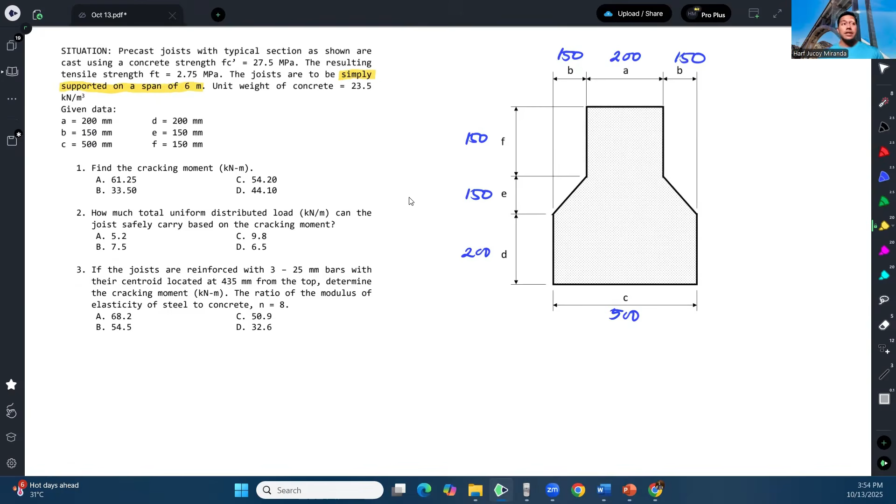Pero normally naman kasi, total sinabi niya to, simply supported, no? At dahil kapag simply supported ang isang beam, it will be subject to pure positive bending. So ibig sabihin yung bending moment natin pag ganito.

Okay, why is that important? That's important because we need to know exactly where is the extreme concrete tension fiber. Kasi doon mangyayari yung cracking na binabanggit natin. So in this case, dahil sa positive bending, ito ngayon ulit yung extreme concrete tension fiber. Ito namang nasa top, ito naman yung extreme concrete compression fiber. So syempre magbe-base tayo dito sa extreme concrete tension fiber in finding the cracking moment.

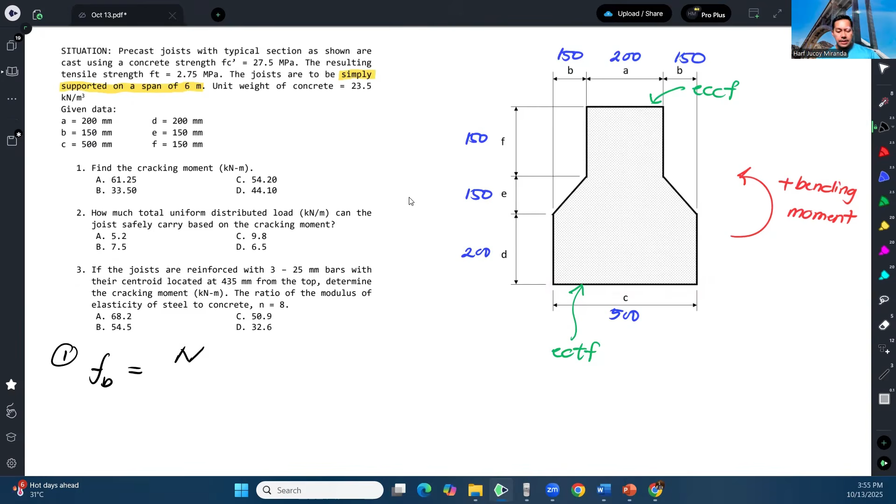But now, we will need to know first ano yung neutral axis, or nasaan yung neutral axis. Kasi para ma-compute natin yung cracking moment, magbe-base lang yung computation natin sa bending stress. Ang bending stress ay MC over I. So, gagawin lang natin tong tensile stress. Ito magiging cracking moment, kasi ito, yung C, papunta sa tension side or extreme concrete tension fiber, over the gross moment of inertia.

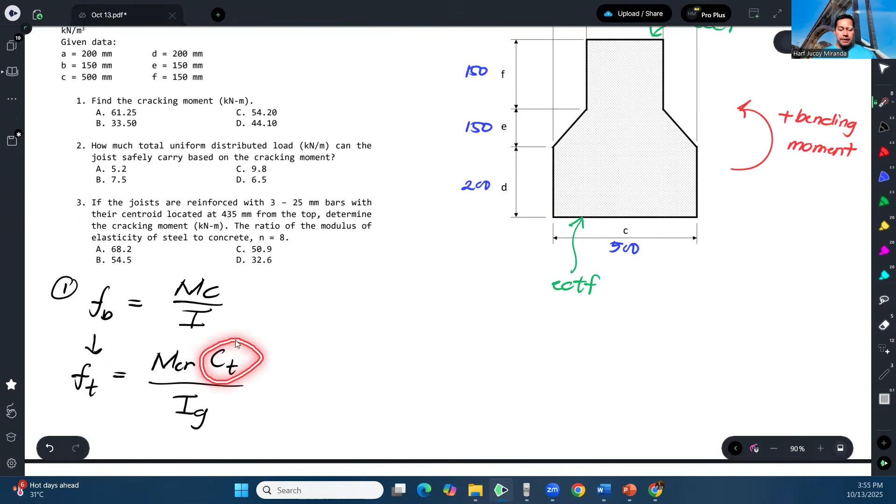Okay, now of course kung rectangle ito, walang problema sa pag-define ng CT. Wala rin problema sa pag-define ng gross moment of inertia. Kaya lang ngayon, hindi na siya rectangle. So anong gagawin? What we would do is we would first subdivide this into simpler shapes.

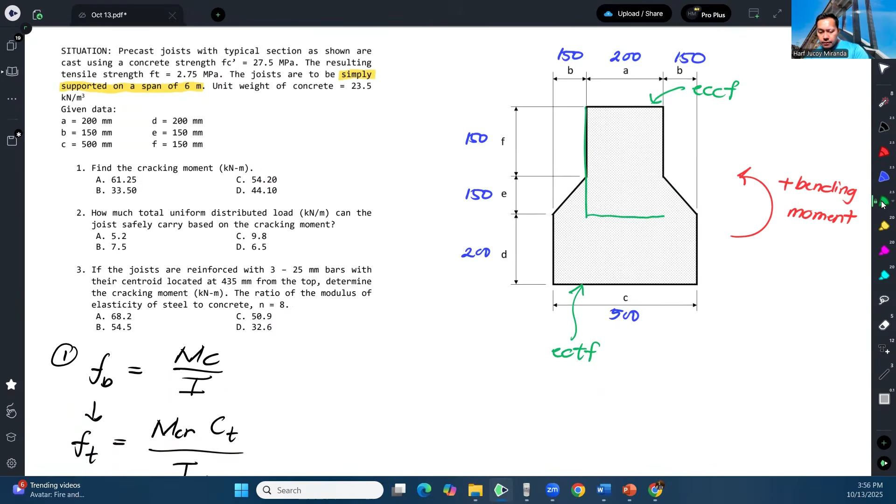Ang naiisip ko na magandang subdivision dito ay pwedeng ito, hanggang dyan. Okay, section 1 yan. Tapos ito, dalawang triangle, sabihin ko na lang na pareha silang section 2, total symmetrical naman. Tapos ito yung section 3. So, dalawang rectangle, dalawang triangle.

So, tatlong sections. Okay, let's define kung nasaan yung neutral axis nito. So, let's say ang neutral axis niya ay located dito. Assume lang ito, hindi naman importante kung tama yung assumption. Let's say nandyan yung neutral axis.

Ayan. So, i-define natin yung location ng neutral axis. Pwede kasi from the top, pwede from the bottom. So, kayo bahala, sa akin gawin ko na lang na from the bottom. Ayan, para ayan na rin mismo kaagad yung CT natin. Kung ano man yan, na Y bar, kung ano man yung distance na yan, yan na rin kaagad yung CT natin, kasi yan yung location ng extreme concrete tension fiber.

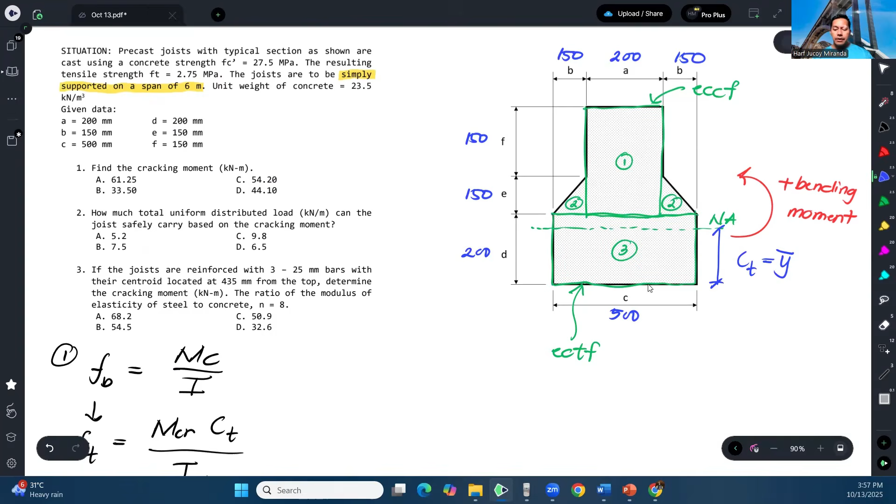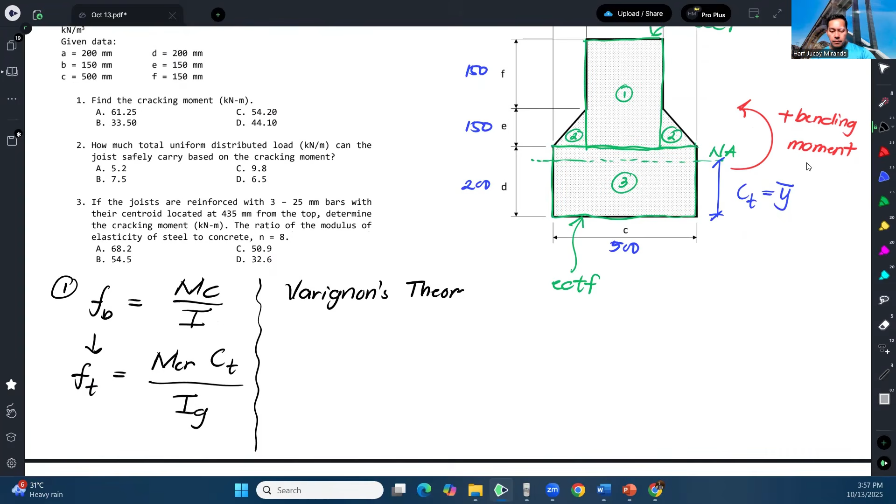Okay, so para ma-locate muna yon, we will apply Varignon's theorem. Okay, magmo-moment area tayo, summation of moment area. Sa bottom tayo mag-base.

So, we have, ang total area, tawagin kong AT, times y bar, equals yung moment ng mga subdivided shapes. So, yung area 1, y1, plus yung area 2, dalawa to no, gawin ko na lang times 2, area 2, tapos y2, plus area 3 times y3. Where y1, y2, and y3 are the location of the centroid of each shape from the bottom.

Okay, so ito, ano ba ang location ng centroid nito from the bottom? Dahil rectangle yan, mula bottom hanggang dito muna, that's 200. Tapos mula bottom hanggang dito, ano bang height nito? Di ba ang height nito ay 300? 300 kasi siya, so ibig sabihin yung centroid niya ay nasa half ng 300. So, in short, nasa 200 plus 150. Tapos, ito namang Y2, yung centroid naman itong dalawang triangle na to, nandito.

So, located siya at a distance Y2 from the bottom. Ano yung distance na yun? Mula dito hanggang dito muna sa base ng triangle, that's exactly 200. And then from here to here, remember, ang centroid ng triangle ay 1/3 from its base. So, ibig sabihin, 1/3 ng 150. And lastly, yung centroid nitong 3, dahil rectangle lang naman yan, that will just be half of 200, o 100.

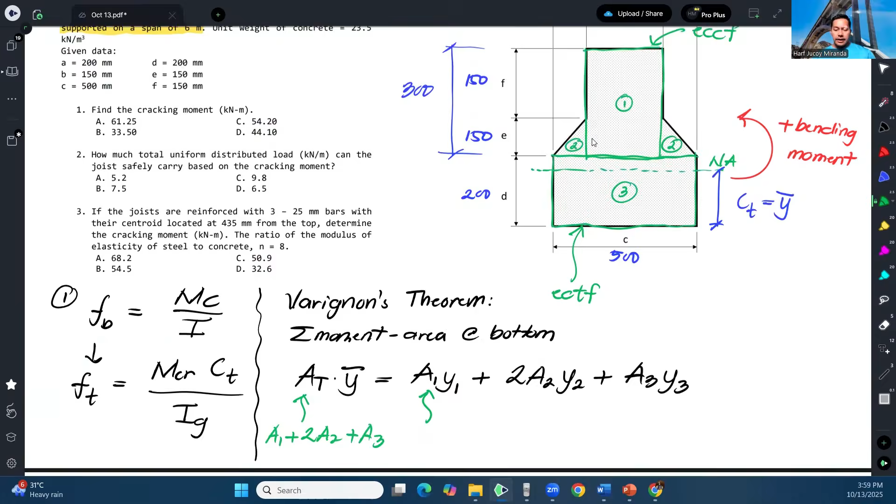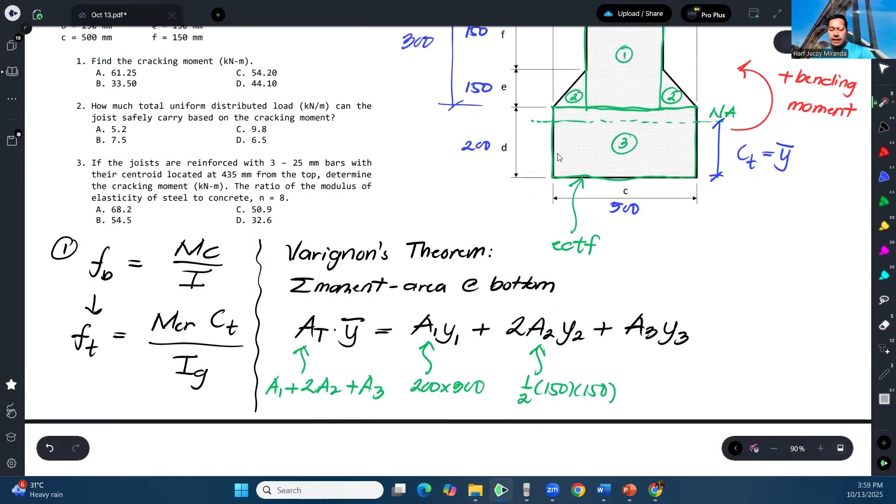Itong A1, area 1 is 200 by 300. Tapos itong A2, area ng triangle, so 1/2, 150 by 150 - 1/2 base times height. Ang base natin 150, ang height natin 150 din. Tapos yung area 3 natin is just rectangle, 200 by 500.

Tapos yung y1, yung y1 natin ay 200 plus half ng 300. Yung y2 natin is 200 plus 1/3 ng 150. Tapos yung y3 natin is just 1/2 ng 200.

Okay, so ulit, ito, mula dito hanggang dito, 200. Mula dito hanggang dito, kalahati nito. Tapos ito naman, mula dito hanggang dito, 200. Mula dito hanggang dito, 200. So mula dito hanggang doon sa centroid is 1/3 nung height na 150. And then lastly, mula dito hanggang dito is just half ng 200.

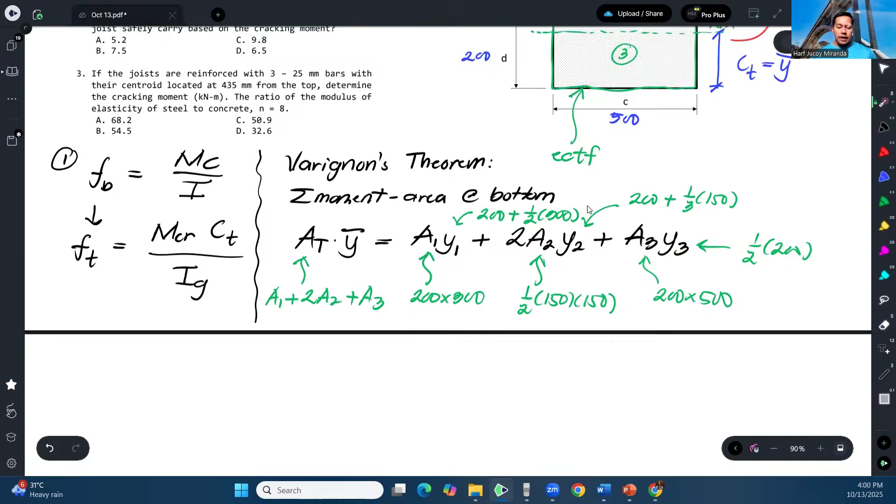Okay, and from there, we should be able to calculate for y bar. So solve natin yung y bar.

Okay, so dito diretsuhin ko sa calculator. Ito kunwari area 1 ko, tapos yung y1 ko i-compute na natin: 200 plus 1/2 ng 300. Plus dalawang area 2, lagay natin sa B: 200 plus 1/3 ng 150. Plus area 3 times y3, ang y3 natin is just half ng 200 or 100. Over yung total area is area 1 plus dalawang area 2 plus area 3.

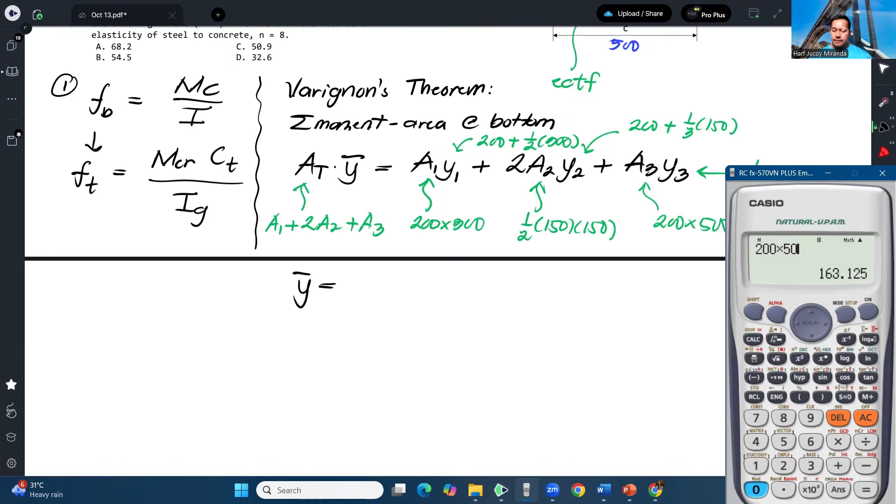Okay, press calc. I-define natin area 1: 200 by 300. Ang area 2 ay 1/2 base times height. And ang area 3 ay 200 by 500. Okay, so that will be our y bar: 200.68 millimeters, from the bottom.

Okay, so ang next na kailangan nating i-compute guys, okay na to. Ito na rin kasi yan eh, ito na rin yan. Yan na rin yung CT natin.

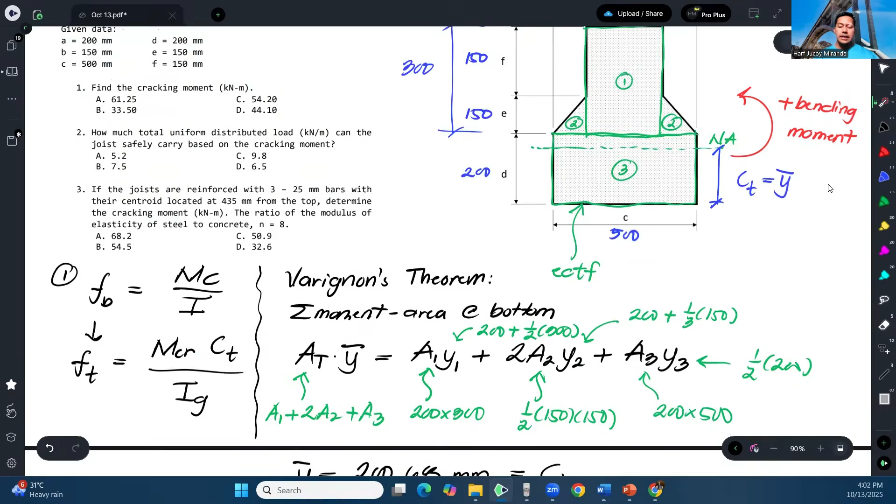Ang next na kailangan natin i-compute, yung gross moment of inertia naman. Ang problema ngayon, kailangan natin i-transfer lahat ng mga moment of inertia ng mga shapes na to papunta dito sa neutral axis. Okay, so magta-transfer formula tayo.

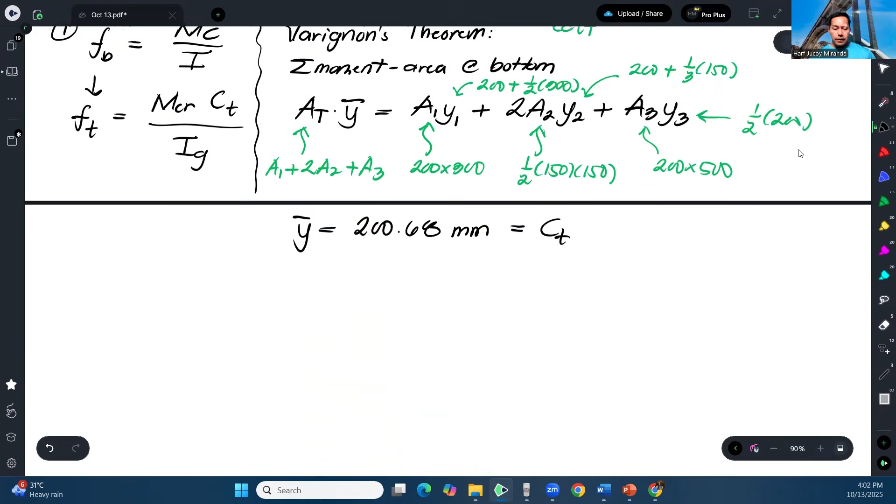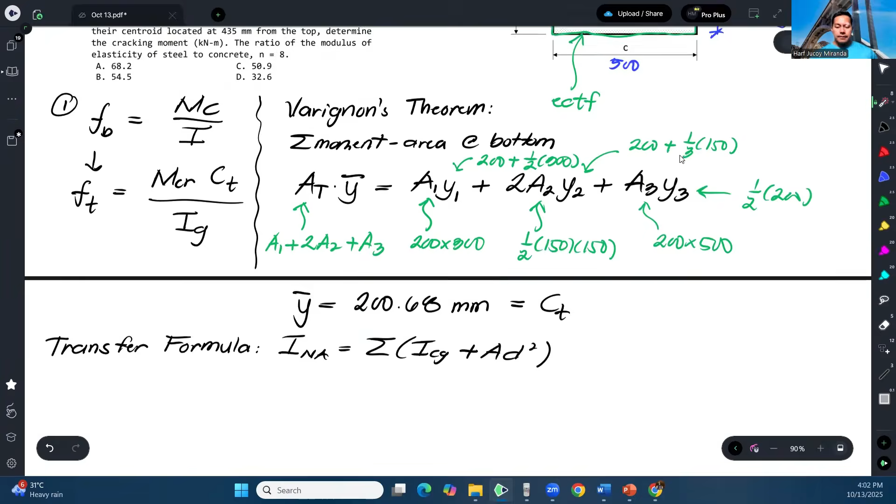So transfer formula: I NA is equal to summation ng centroidal moment of inertia plus A D squared. Tatlo yan, tatlong shape - I mean apat pala technically, pero tatlo kasi dalawa, parehas lang naman to, so times 2 lang natin to. Unahin ko na kagad to: ang centroidal moment of inertia nito is B H cubed over 12.

So B is, ano yung B nun? 200, tas ang H 300. So 200 by 300 cube over 12. Plus yung area niya, tapos D squared. Ano yung D? Yung D is yung distance ng sarili niyang centroid papunta dun sa neutral axis. So ito yung D1.

Ano yan? Gaano yan kalayo? Well, normally, ang ginagawa dito para mas mapabilis yung pag-compute ng distance na yan, gagamitin natin to palagi - always use this. Actually, store ko na yan sa calculator, store natin sa Y.

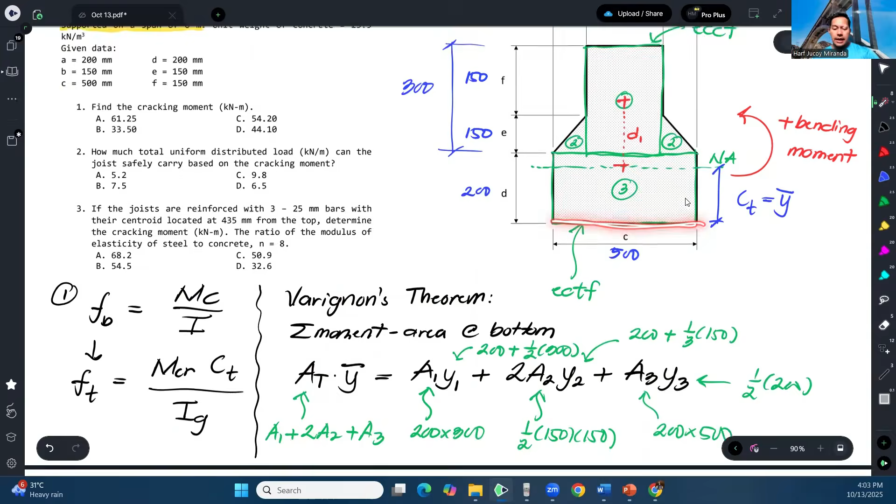Para mapadali, tingnan niyo, dahil ang basis natin kanina sa pagkuha ng Y-bar sa Varignon's theorem is from the bottom, so gamitin na lang natin itong mga distances na to - dahil from the bottom naman yan. So kunwari, ito yung Y1, mula dito hanggang dito, ito yan eh. Kailangan lang natin i-minus to para makuha to - ito minus ito. Kaya yung D1 natin, this value minus Y bar.

So lagay ko na lang: magiging 200 plus 1/2 ng 300 minus Y bar, squared. Yan yung para sa rectangle na nasa area 1.

Okay, next, how about area 2? So plus - ang centroidal moment of inertia ng triangle ay BH cube over 36. So BH cube over 36, plus area 2 D squared.

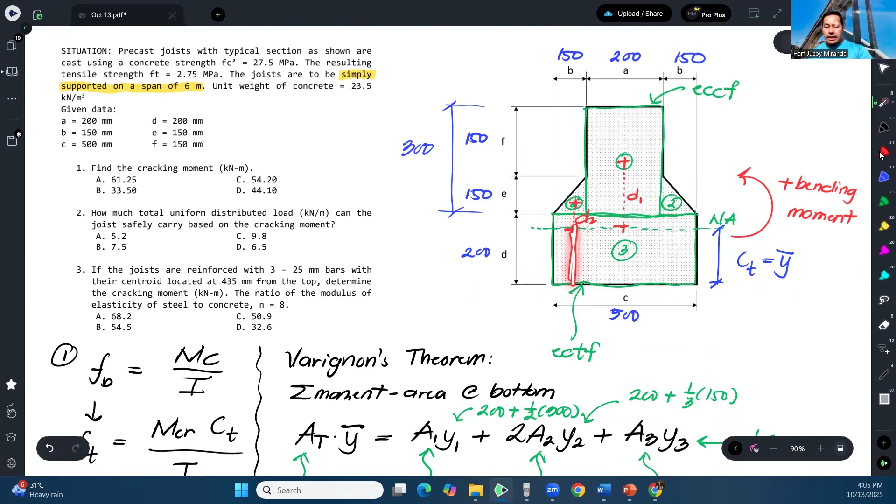Ano naman yung distance ng centroid niya papunta sa neutral axis? Ito na lang gamitin ko - hinahanap natin, gano'n to kalayo? Okay, so ulit, ang basis natin galing sa ilalim dahil nakuha naman natin yung Y-bar galing sa ilalim. So mula sa ilalim hanggang dito, ito 'yun - 200 plus 1/3 nitong 150. Ibabawas lang natin 'to, ano ba 'to? Yan yung Y-bar. So we will have 200 plus 1/3 ng 150 minus Y-bar, tapos don't forget squared.

Tapos lahat ng to, we have to multiply by 2, kasi dalawa yung area 2 eh. So same lang din naman yung distance nito - yan din yung D2.

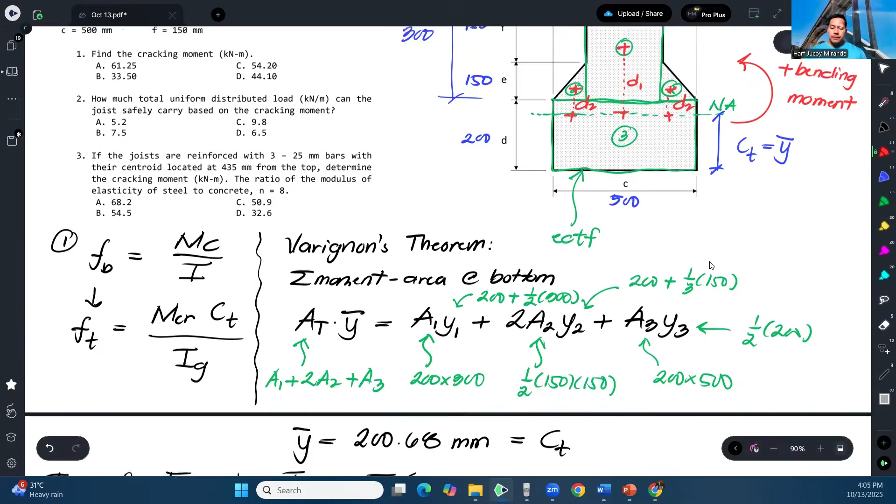Okay, lastly for area 3, this is the distance D3. So the idea is the same, we subtract the location of its centroid, which is half of 200, from our Y bar to get this. So we have plus B H cube over 12 plus area 3 times 200 over 2 minus Y bar squared. And that will be our gross moment of inertia.

Let's encode it. So we have 200 by 300 cube over 12 plus area 1 at A. Then this, 200 plus half of 300 - half of 300 is 150, so 150 plus 200, that's 350 already. 350 minus Y bar squared. Plus

2 times 150, let's make this to the fourth, over 12 plus area 2 at B. Then we have 200 plus 1/3 of 150. 1/3 of 150 is just 50, right? So that means this is just 250. Minus Y bar squared, okay?

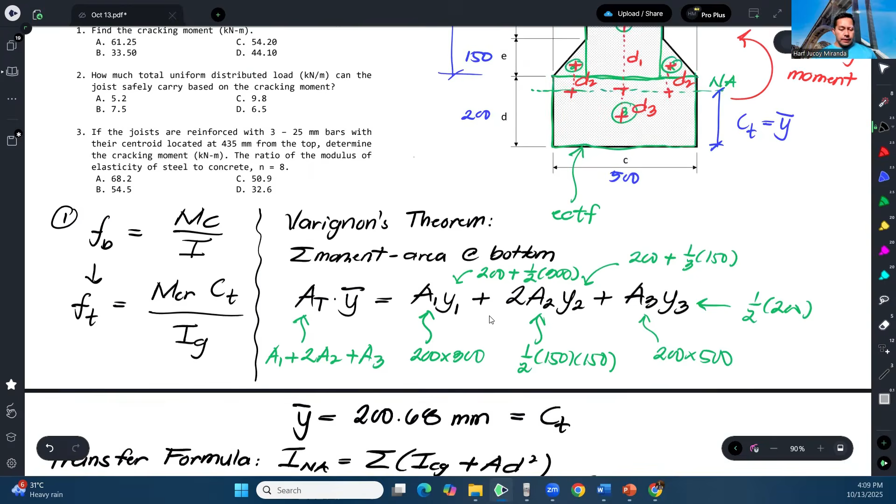Okay. And the answer is actually 44.10. So guys, let me double check the computation, maybe something's off, since there's a bit of discrepancy. Let me double check the IG, the gross moment of inertia.

So 200 by 300 cube over 12. Area 1, then area 1's distance is 350, right? Because half of 300 is 150 plus 200, so 350. Then y squared plus 2 times this - sorry, I overlooked something. So this should actually be over 36, that's why there was a discrepancy. See, for the triangle, right? Then this, 250, then 500 by 200 cube over 12. Okay, I think that's right now, so that's it.

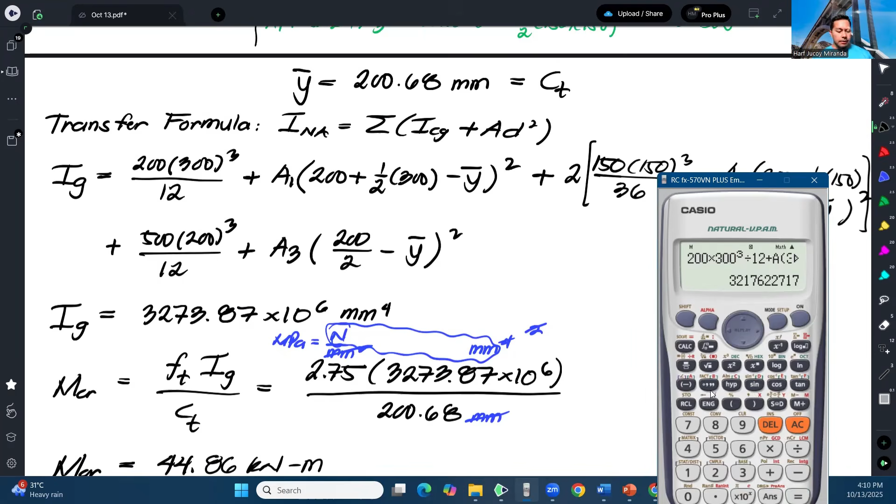So it will change a little bit. So 3217.62. Okay, let me store this in the calculator. Then let me recompute this. So it comes out to 44.09. So there's just a slight discrepancy - 09 kilonewton meter, and that will be our answer.

Okay, so that's why the answer is 44.10.

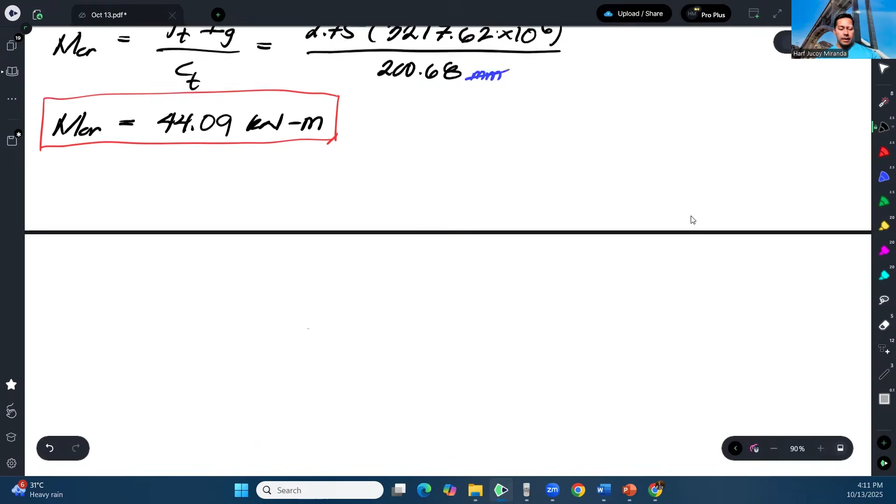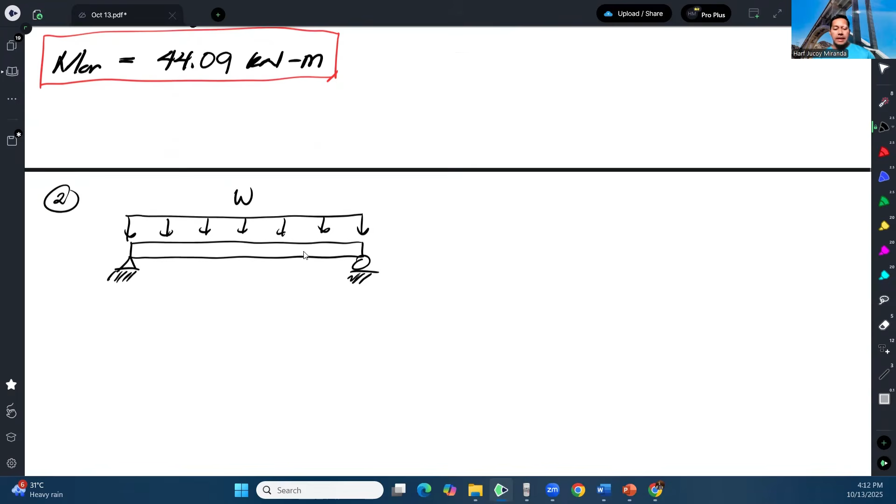All right, next: how much total uniform distributed load can the joist safely carry based on the cracking moment? So we're solving for W, the total. Since it's stated as simply supported, the beam looks like this. And what we need to find is the uniform load it can carry before it cracks. Of course, we need to base that on the maximum moment, which occurs at the center, which is WL squared over 8. So from here, we can equate this to the cracking moment we computed.

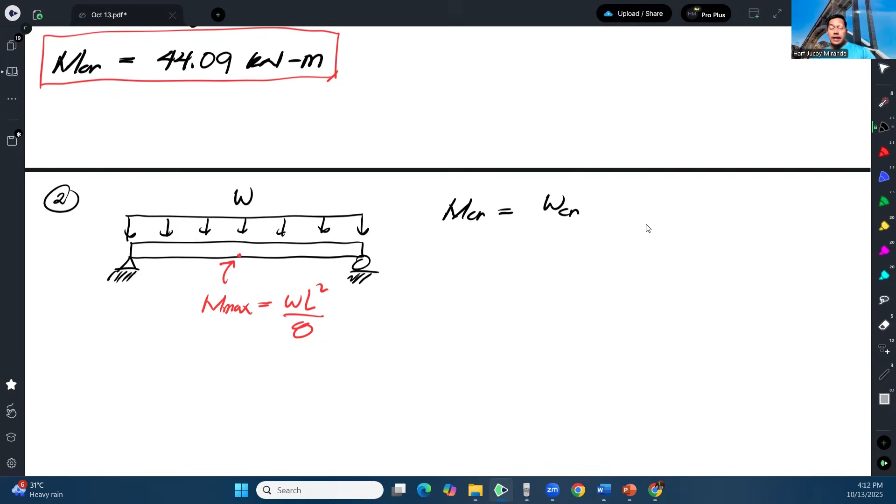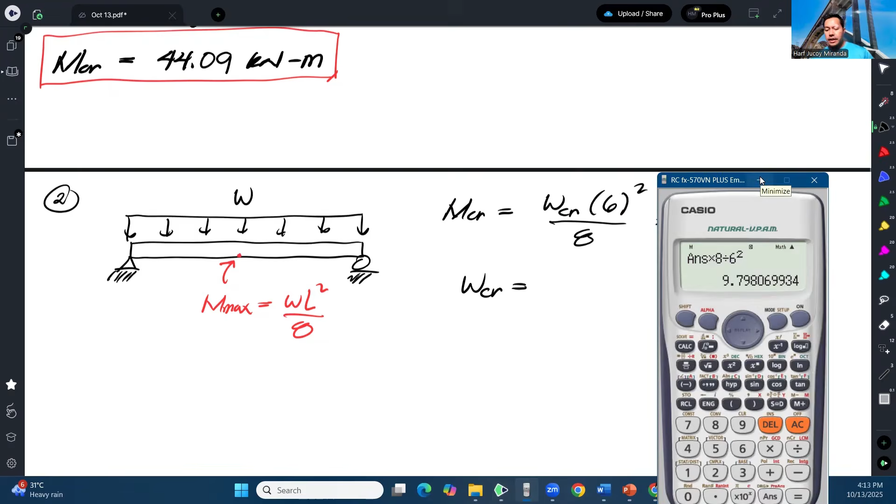So we will have MCR equals W - let's call it WCR since it's the cracking uniform load. Then L, which is 6, squared over 8. Our cracking moment is 44.09. So we will solve for the cracking uniform load: divided by 1 million, then times 8 over 6 squared. That gives us 9.79, or we can just say 9.8 kilonewton per meter, and that will be our answer.

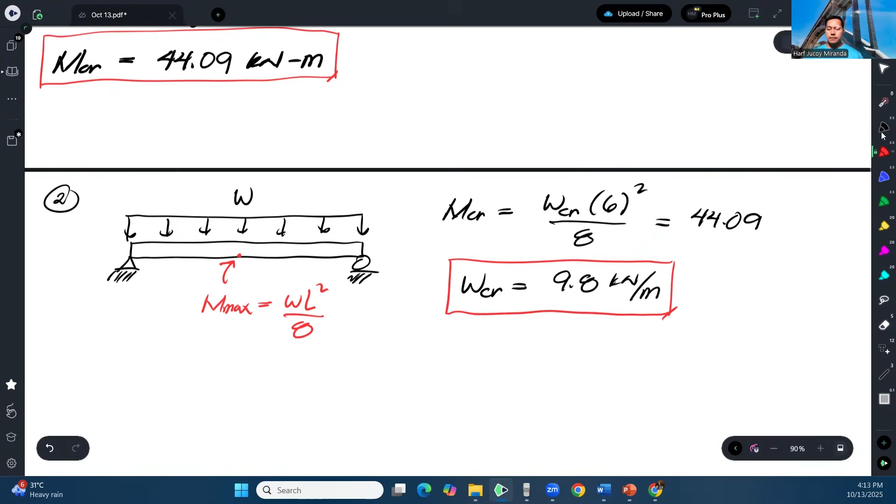Okay, so that's why the answer here is letter C.

Next, for number 3, if the joists are reinforced with 325 mm bars with their centroid located 435 mm from the top, determine the cracking moment, and we are given the ratio of the modulus of elasticity of steel to concrete, n is equal to 8. So this time, there is reinforcement. It's no longer plain concrete.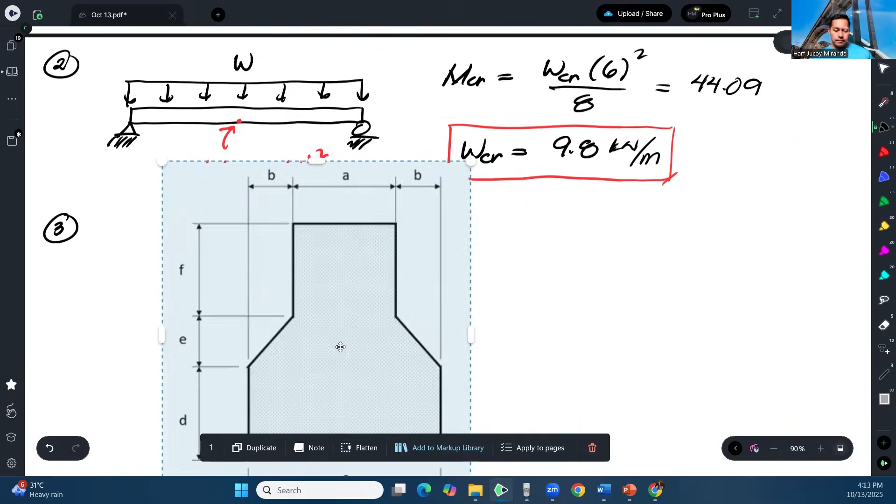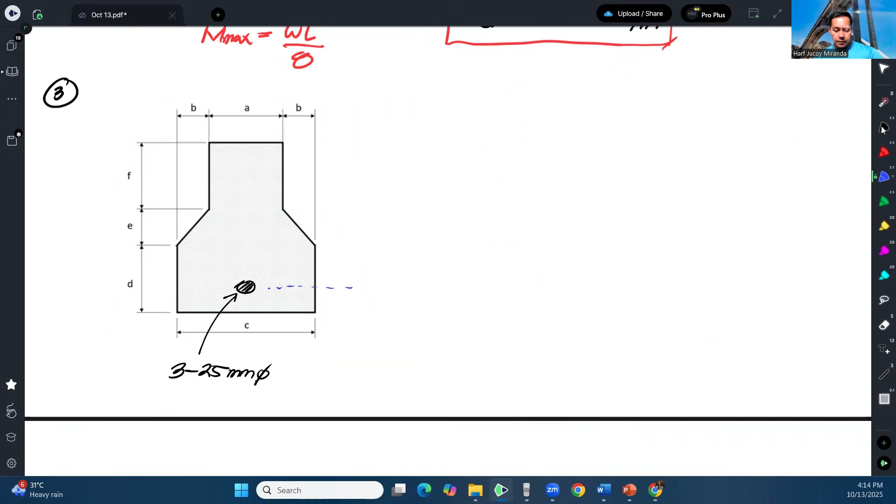So it placed tension steel here, 3-25 mm, and its location is at 435 mm from the top.

So this stays the same. This is 200, this is 150, this is 150, 150, 200, and 500.

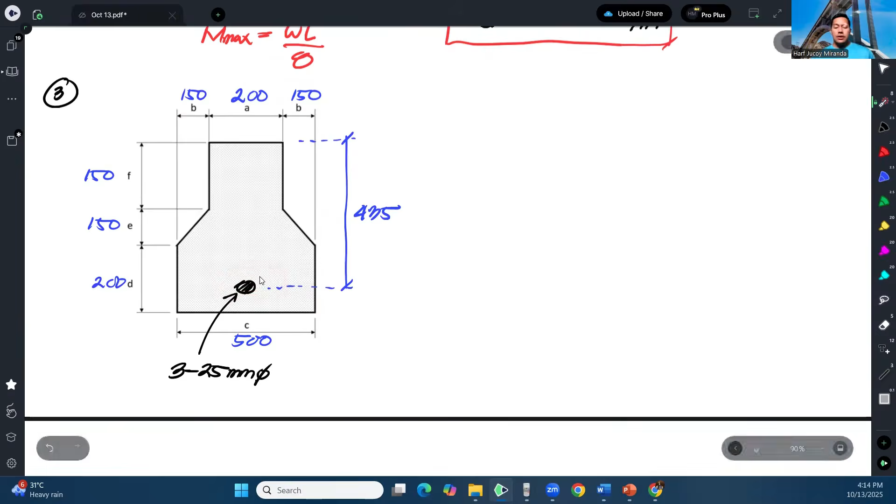This time there is reinforcement. So what's the difference when there's reinforcement? The difference is, of course, we include this reinforcement in computing the gross moment of inertia. The gross moment of inertia, IG, according to the code, is the moment of inertia of the transformed section before cracking occurs.

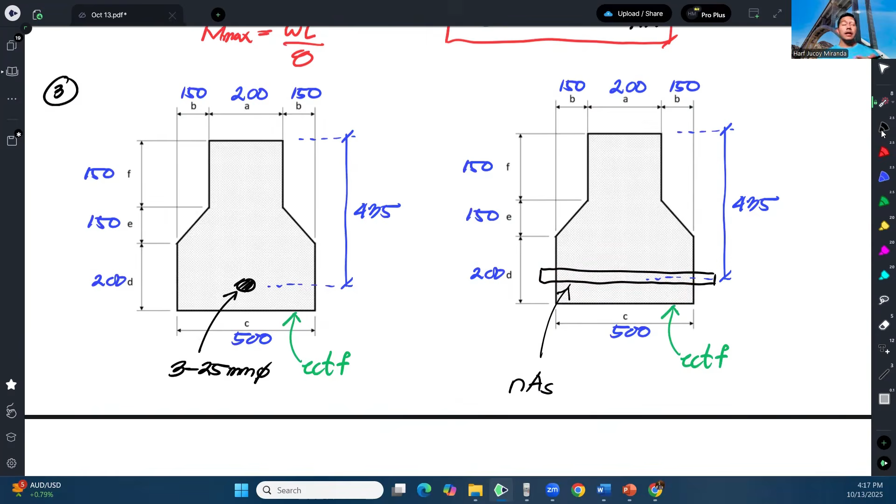That's why in the computation, when uncracked, this becomes n-1 times As. Alright, so that's why we have n-1 As there. As is basically just the total area of steel, so 3 times pi over 4 times 25 squared. This is our transformed section.

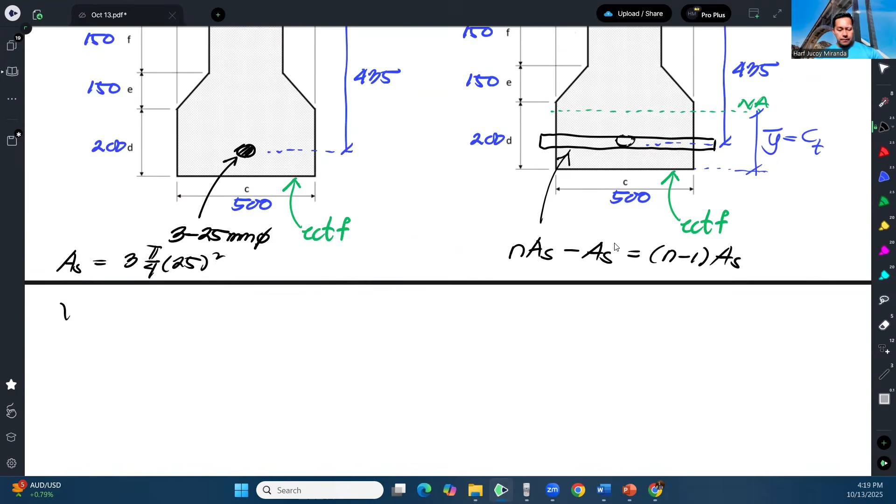Okay, so we will once again apply Varignon's theorem. We take the summation of moment areas at the bottom. Basically the same as before.

Total area times y-bar equals area 1 times y1, plus area 2, y2, plus area 3, y3. Except now we also have the area of the steel, so plus n-1 As, times its location, y4.

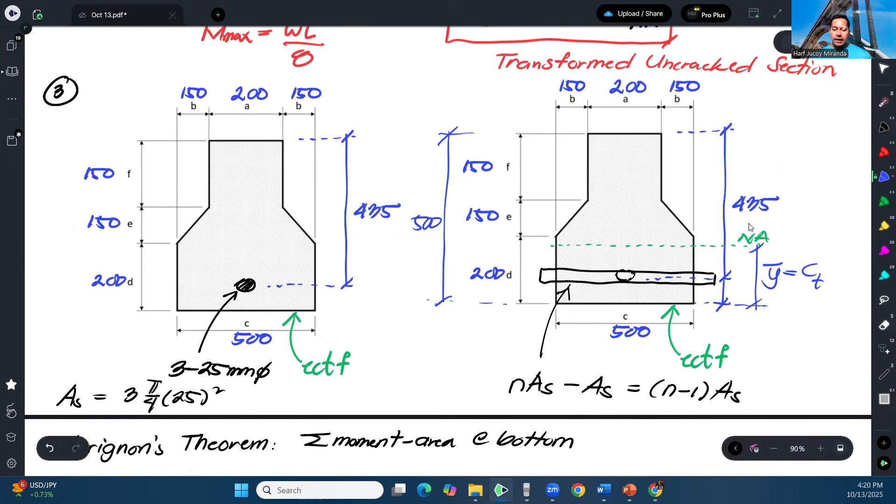So currently, we know the overall depth is 500, since 150 plus 150 plus 200 equals 500. That means the location from the bottom is 500 minus 435, which equals 65.

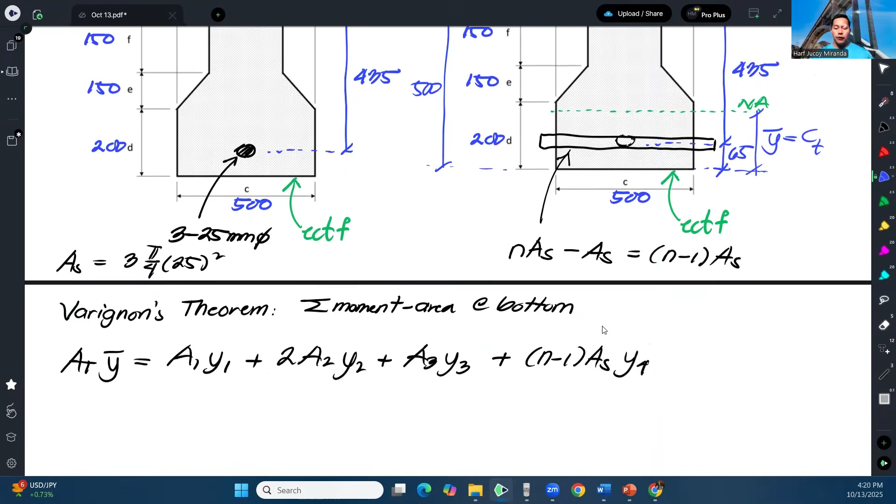And that is 65, that's our y4. Okay, so once again, this will change again - A1 plus two A2 plus A3 plus n-1 AS.

This one is still 200 by 300. This is still 1/2 of 150 by 150. This is still 500 by 200. And then, since this n is 8, right, this will become 7 times this.

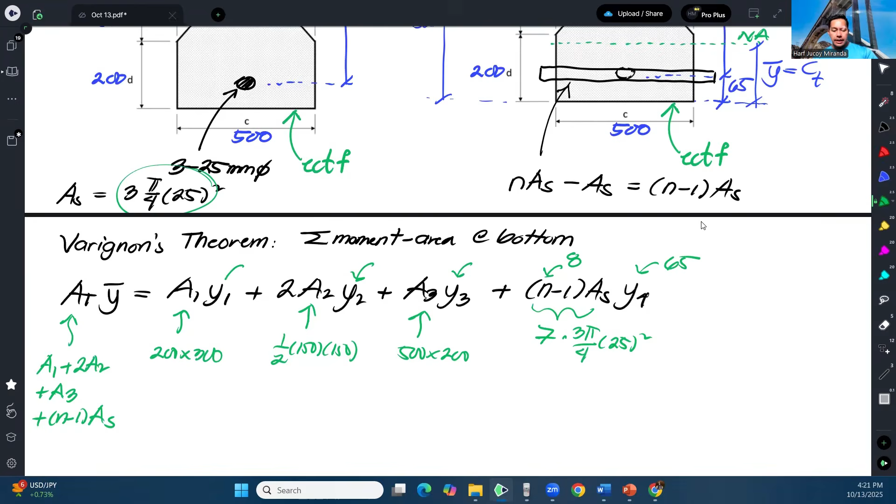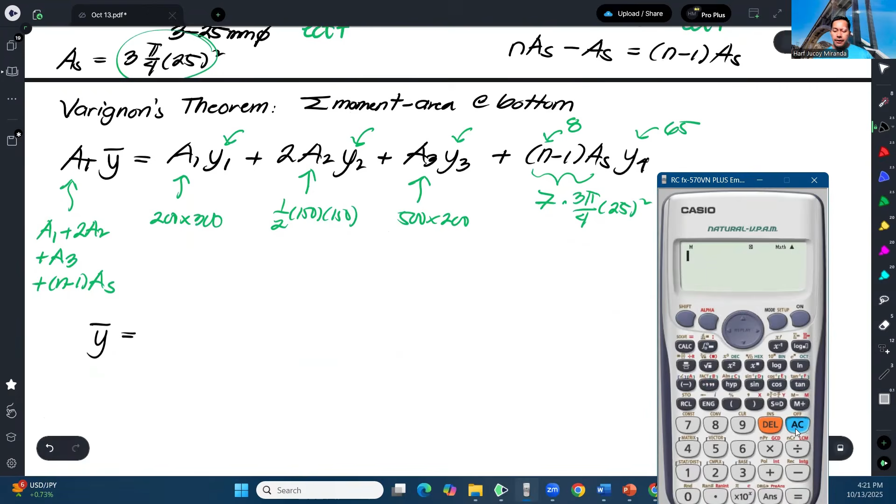Okay, and then once again, this is 65. This, same as before. Same as before. All we have to do is solve for y bar. So, y bar. Actually, if I saved what we typed earlier, we could have used that.

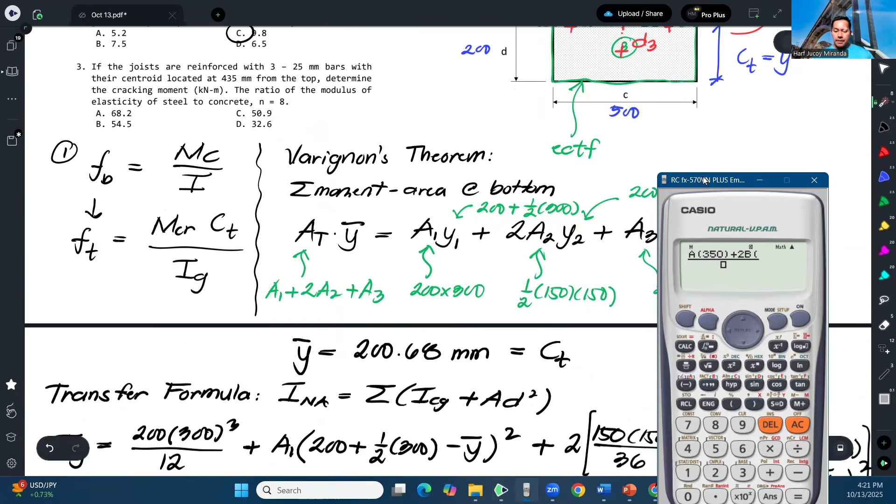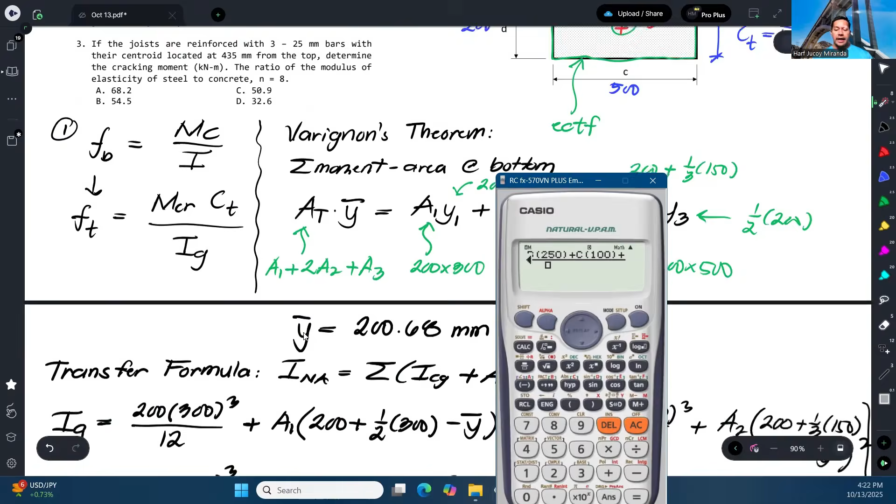Okay, plus two area 2. Then, its moment arm is 200 plus 1/3 of 150, so that's 250. Plus area 3. Then the location of area 3 is at half of 200, so 100. Plus area, the n-1 AS - I'll put that in D. Then its location

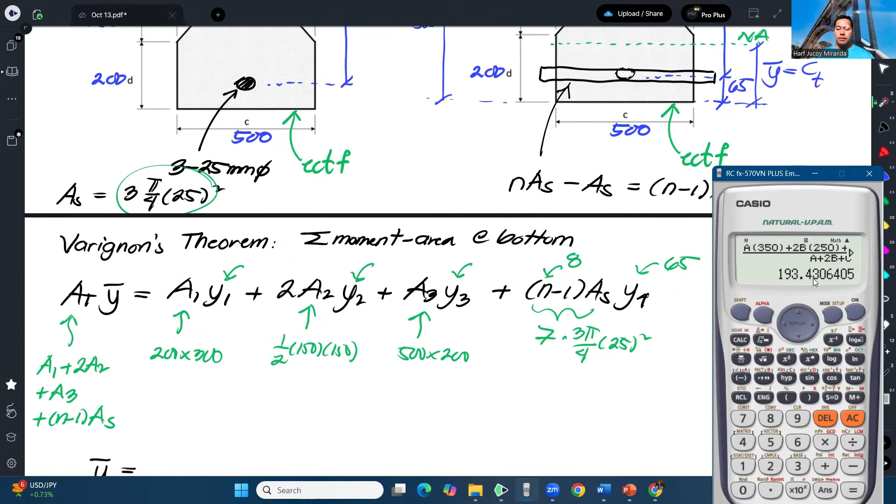is at 65 from the bottom, over total area - area 1 plus two area 2 plus area 3 plus our new area, n-1 AS. Then press calc, we don't change anything here, same as before. This one, let's define - 7 times 3 pi over 4 times 25 squared. So this will be our new y bar, 193.43.

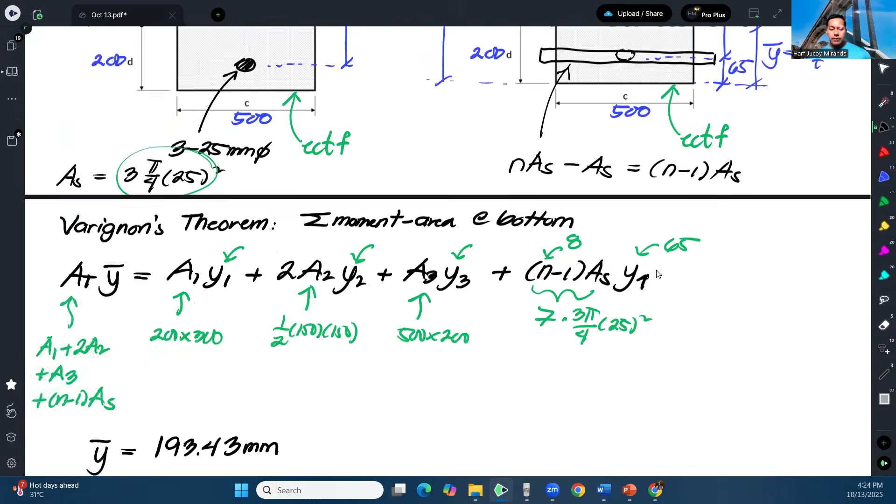Okay, so what happens now is n-1 AS, then its distance squared - this is our centroid, and this is the centroid of the steel. So this is the distance. This is distance 4. From the bottom up to here, that's our y bar. From the bottom up to here, that's 65. So we subtract y bar and 65.

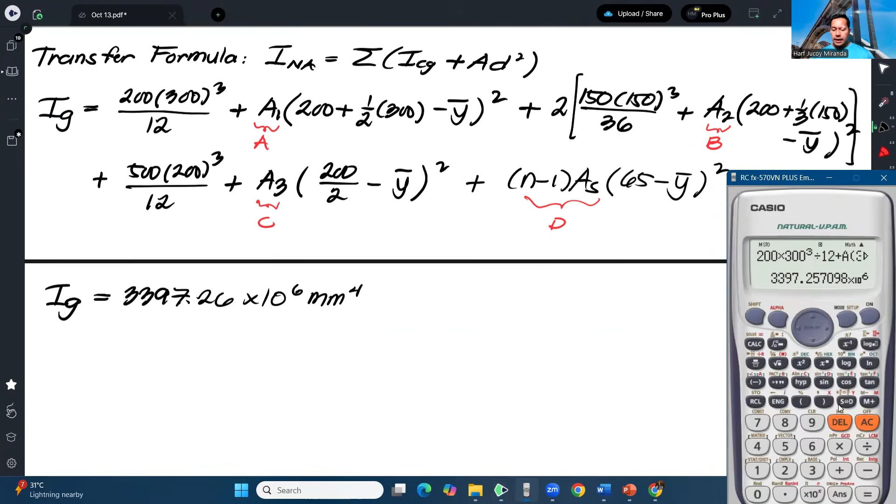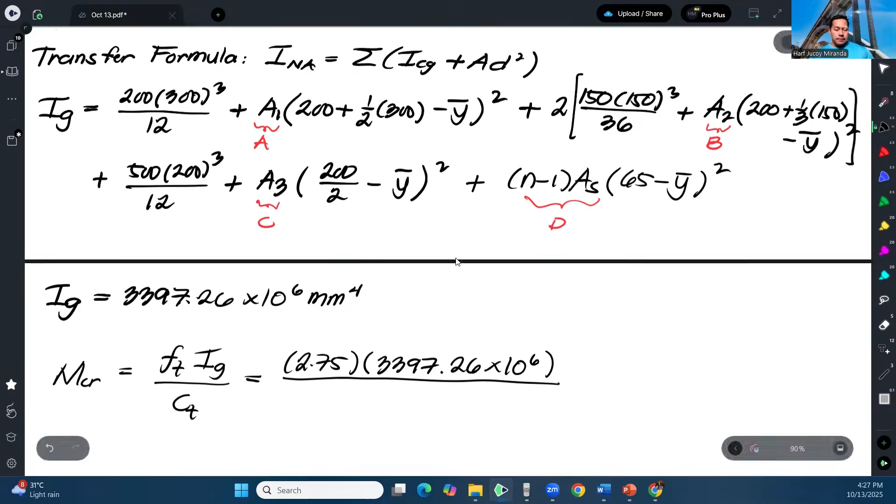Okay, so let's store it in the calculator. Then after this, we can now compute the cracking moment, applying the same formula - that is Ft Ig over Ct. So this is 2.75, and then this is 3397.26 times 10 to the 6 over Ct, which is, what's the complete value? 193.43. Okay, so again, you will just divide this by 1 million to make it kilonewton meter.

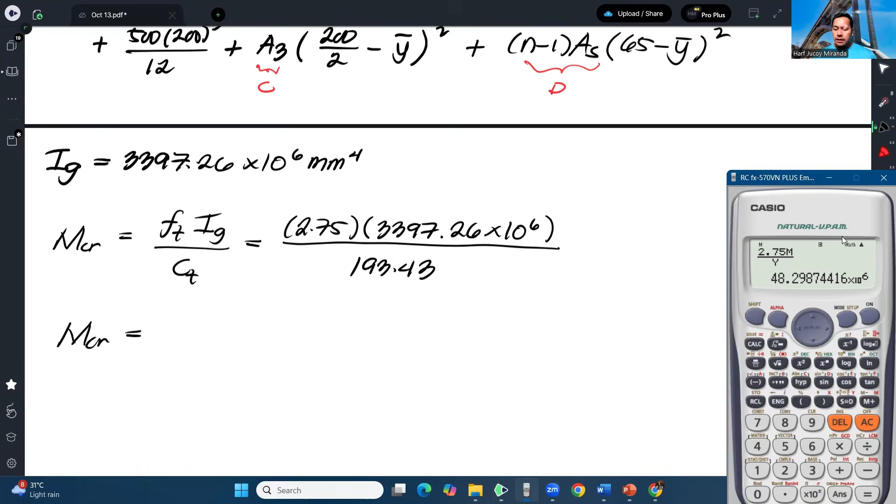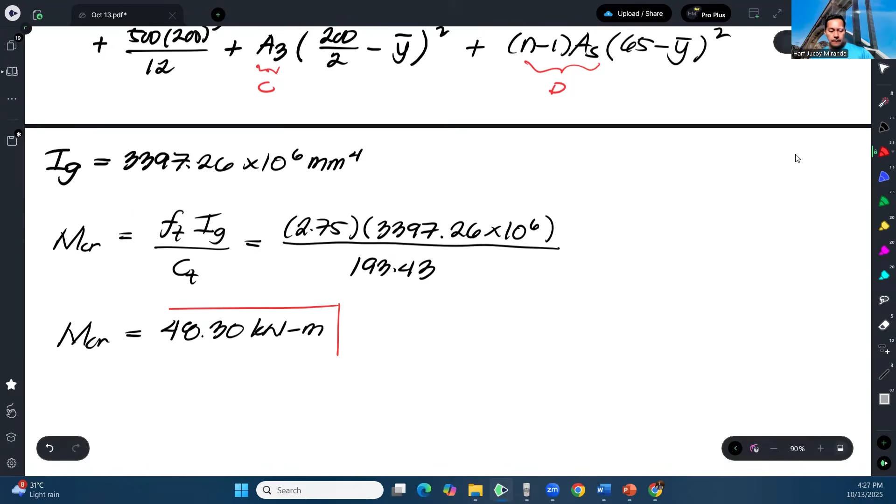So we have 2.75 times moment of inertia over C. Okay, and that gives us 48.3, that's 48.3 kilonewton meter. So supposedly the correct answer here is 48.3.

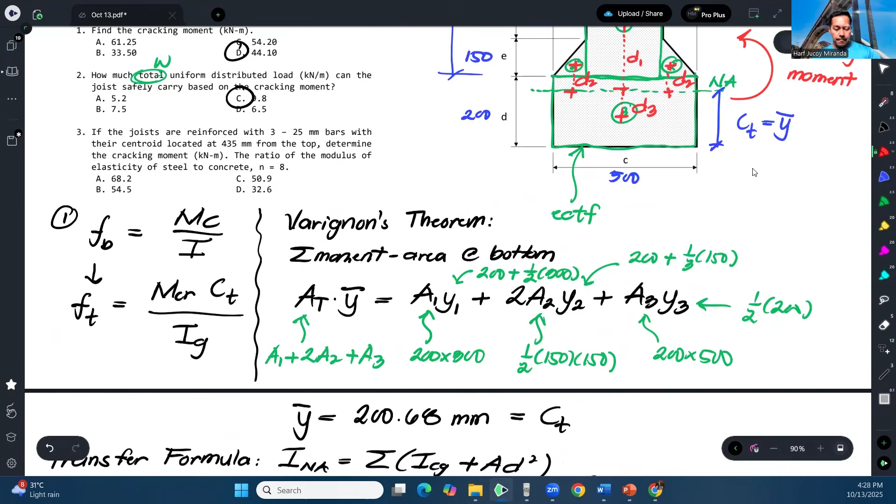Okay, for number 2. And that's how we solve this problem.